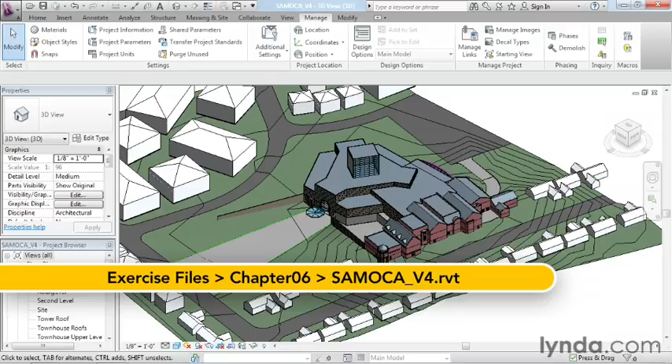Let me go to the floor plans, to the main level, and zoom in a little bit. What I've provided here to get us started is just a basic wall, and there is this one opening penetrating through it. The easiest way to see that is to open up this section here, so I'll double click that section head to open it up. Here's the basic wall, and here's the opening cut through it.

The final thing I've added is, in a later chapter we're going to be creating a big grand stair in this space. So I've added some detail lines directly on this view to let you know what area to avoid when you're adding the void objects later to this wall. We don't want the penetrations in this space right here.

Let's get started. I'm going to take this wall and select it, and over here on the properties palette I'm going to give it a height. I'm not sure exactly what height I want, so I'll drag it first to get close. That's about good, that's 54.6. Let's maybe try about 58 feet and see what that gives me.

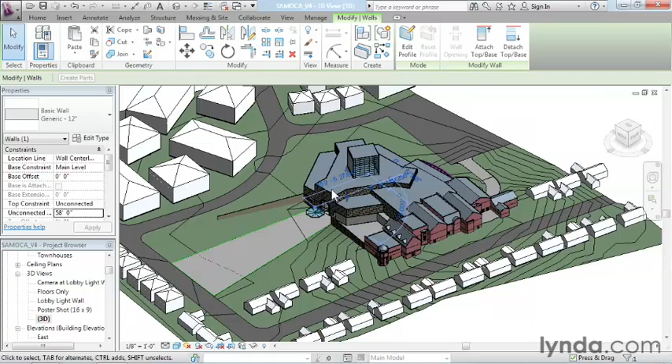That gives me just about up to the ceiling. That looks pretty good. What you'll notice here is it's doing something a little strange right there. If I go back out to the outside, you'll see this wall is actually punching through the exterior when it goes up that tall. The simple solution to that is to just notch out that part of the wall.

So I'm going to go back to my floor plan, back to my section view, and notch out this part of the wall here. I'll select it, and we can use the Edit Profile feature to do this. So I choose Edit Profile, and that puts me in sketch mode, and I'll just draw a little notch over here at about 15 feet off the corner.

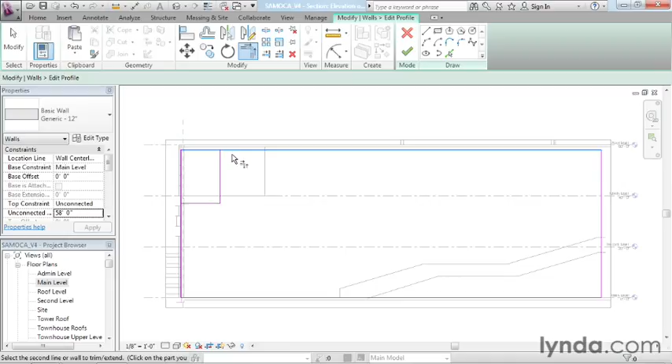I think that'll do the trick, and pull it down maybe about 20, 21 feet, somewhere in that neighborhood over here, and just do a little L shape. Then I'll use my trim tool to clean that up here and here, and finish that. So now that gives me a nice clean corner there.

And if you return to your 3D view, you'll see that the wall no longer penetrates outside the building.

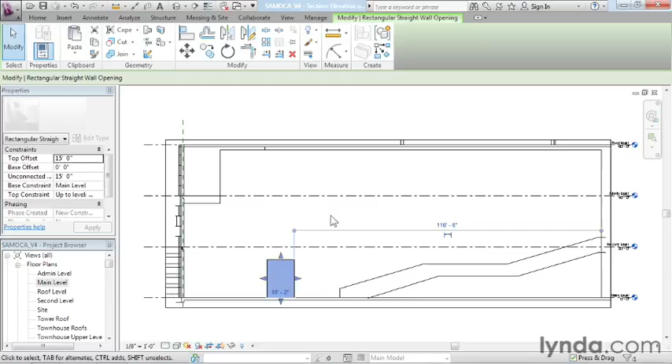Next, I'm going to take this opening here, and we need a similar opening on the second floor and on the admin level. So I'm just simply going to copy that. The second floor one's going to be about over here, and the admin floor one is going to be about over here. I have rough dimensions for that.

This one is about 26 feet off of here. This one is about 53 feet off of here. If you want, you can set those at exact locations, but this is okay of a configuration for now. Now I'm going to go back to the main level floor plan, and I want to select this wall and make it a little thicker.

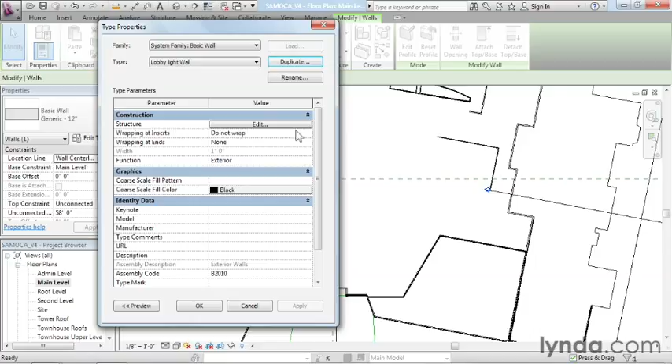That's just simply Edit Type, Duplicate, and I'll call this Lobby Light Wall. Now I'm calling it Light Wall because all of those features you saw at the beginning when I showed you the final version are actually voids cutting into the wall, and there's a light fixture behind them to light up the whole wall and make it a lot more visually interesting.

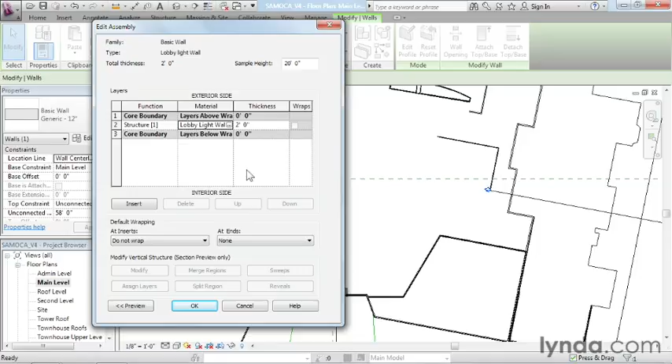All I want to do here is keep this basically a generic wall. I just want to double its thickness, so I'll make it about 2 feet thick. For the material, instead of by category, I've created a material which is just like stone panels, called Lobby Light Wall. So you can just choose that, they're like alabaster stone. That's the wall type. Pretty simple, let's click OK.

You can see the wall thickens up. And the next thing I want to do is give myself some guidelines to use to place the void objects.

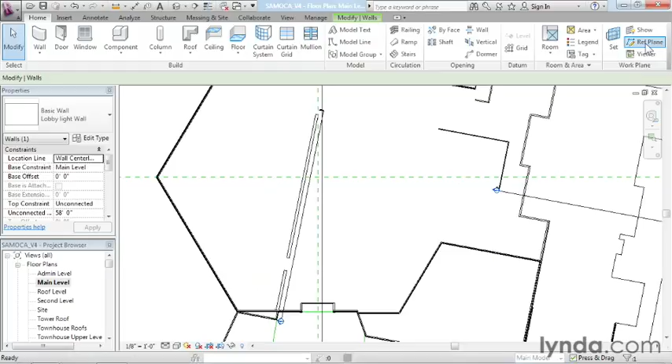I'm going to do that with reference planes. I'll go to the Home tab and select the reference plane button over on the right. The first one I'm going to draw toward the end of the wall, right about there, running parallel and perpendicular to the wall itself.

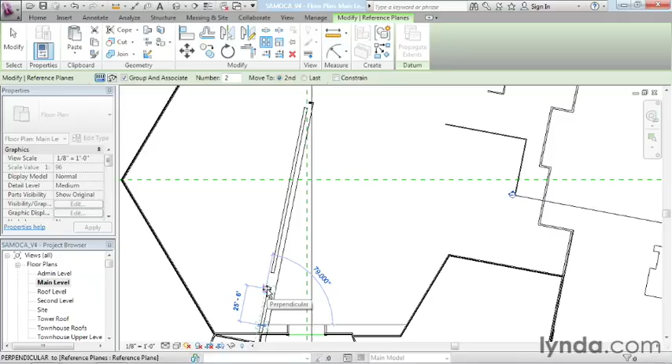If I deselect that, you can see I've just got a short little reference plane right there. I'm going to use the array command, pick my start point, and start moving in the general direction that I want to go in. You'll notice the group and associate feature is turned on here. The quantity is currently just set to 2, and we're moving to the second item. Let me just show you with just those settings.

I'm going to start moving in this perpendicular direction. Let me zoom in a little so I can get this parallel, and I'll go at about 5 feet and click. The number 2 will appear here. The array currently contains only 2 items.

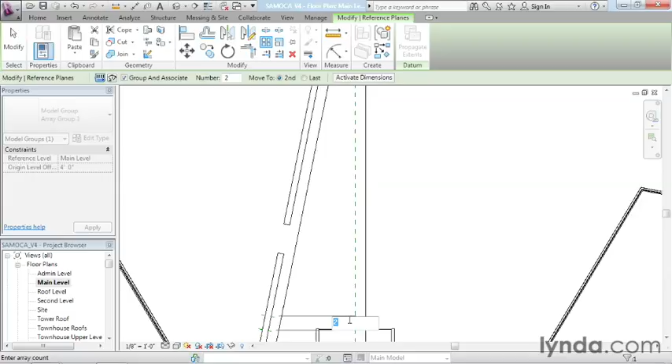What group and associate means is you can actually change the quantity anytime and the array will update itself. So if I put in 20 here, you'll see, if I zoom out, that I now have 20 of those reference planes. If I click it again and say, well, what about 30? And it turns out that for this design, I need 31. So that's the number I'm going to settle on.

What that does for me is, when I open up the section again, it gives me all these guidelines right over here. Now you can snap your voids to those guidelines, and even though the voids are varying sizes, they'll all be lined up on the same verticals.

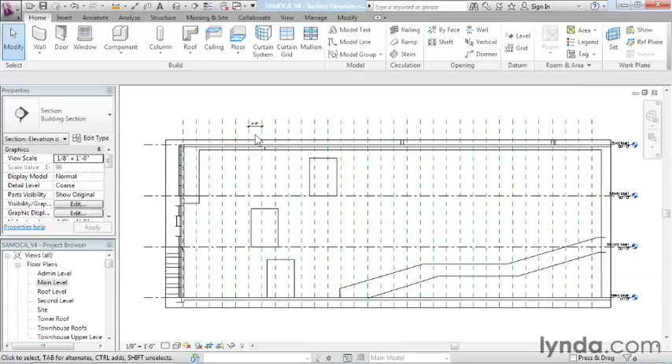The nice thing about the grouped array is you can actually change the spacing after the fact as well. I'm going to stick with the 5-foot spacing, but let me show you quickly how you could do that. I could put a quick dimension on here, select one of these items, activate the dimension, and if I change this number, it would affect the entire array. Now I'm going to undo that and stick with the 5 feet, but just so you know in the future how you can control a grouped array—it's a pretty nice feature.

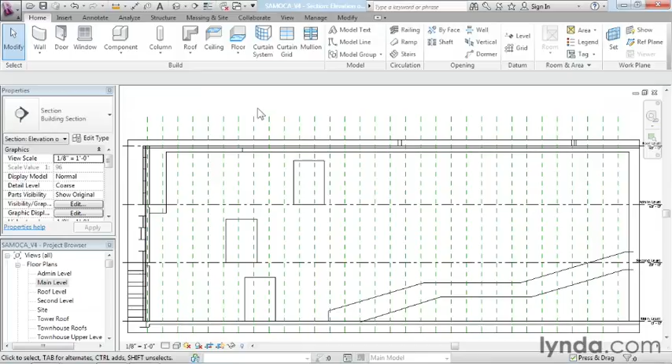That leaves us with the voids. I've built the family already, so we'll just go over and click the component tool on the Home tab and open up our list of choices here on the Properties palette. Scroll down—I've got a family called Wall Void, and there are quite a few sizes.

So I'll start off with one of the larger ones. Let's do maybe an 8 by 96 and bring it in. You can see that you can place this really anywhere you want to go. What you do is sort of place it nearby these grid lines. Maybe I could place a few of them like over here and over here and over here.

After you've placed however many you want of this size—again, avoid this area here where the stairs are—you cancel out of there, go to the Modify tab, and use your Align tool, and just align from the reference plane to the center of the void. You can even lock those if you want to.

The advantage of locking them is if you anticipate changing the spacing of the reference planes, like I showed you a few moments ago. So if you're not settled on the 5-foot spacing yet, and you want to try varying it around, then it would be a good idea to lock these. Align it, lock it, align it, lock it.

When I did this, sometimes I used dimensions to set the vertical, sometimes I just eyeballed where I wanted them vertically. You can get as detailed with this as you want—you could even add a series of reference planes running vertically. But I was more concerned with them lining up in this direction, and the horizontal spacings of where they actually ended up along that line I wasn't as concerned with.

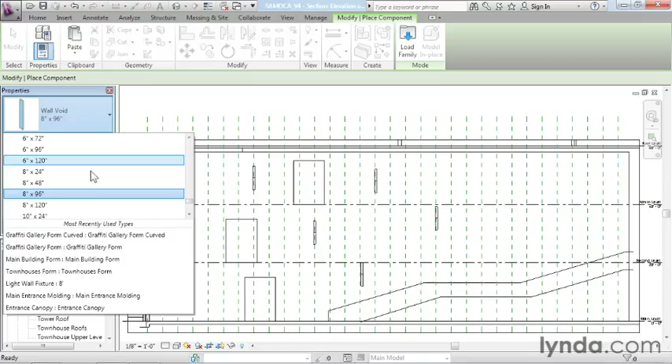But to get the effect that I showed you at the start of the movie, it's just a matter of choosing alternate sizes and placing them somewhat randomly. Let's place a few small ones. Okay, here's a nice thin one.

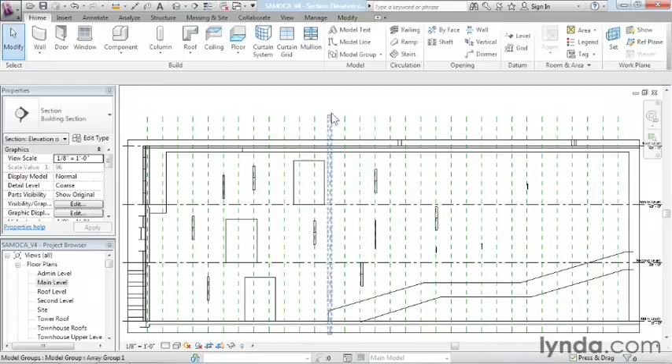Let's find some short ones here. Okay, here's a nice short one. You just have to go here—that's the design part—and kind of make a pattern that's pleasing to you. Your end result, again, will look something like that.

Using a simple void family, we can take what's otherwise a very boring and mundane wall and turn it into an interesting feature in the middle of our design.